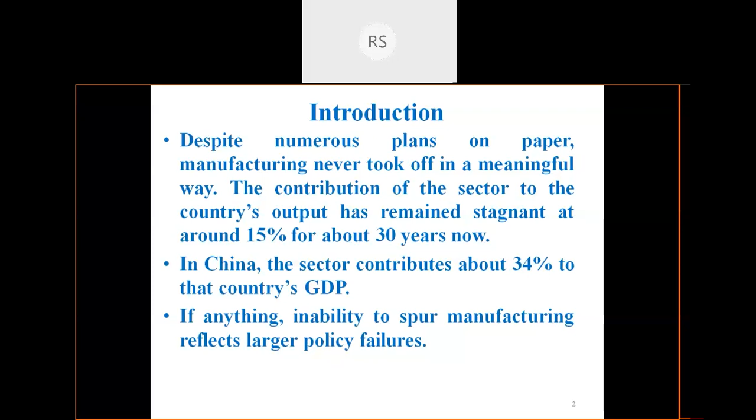This data I have taken from the Niti Aayog website, and it says this represents a policy failure at our level. The government is really serious about the development of products within the country itself.

So government wants a big increase in the contribution of the manufacturing sector. In 2004, to address this issue, the Government of India set up a National Manufacturing Competitiveness Council, headed by the Prime Minister and governed by a group of ministers. In 2006, the Prime Minister expressed concern for improving the manufacturing sector's contribution from 12-14% to 25-35% of the GDP.

If you see the Niti Aayog website, it says that by 2025 we want this contribution to be 25%, because this will add 100 million jobs for us.

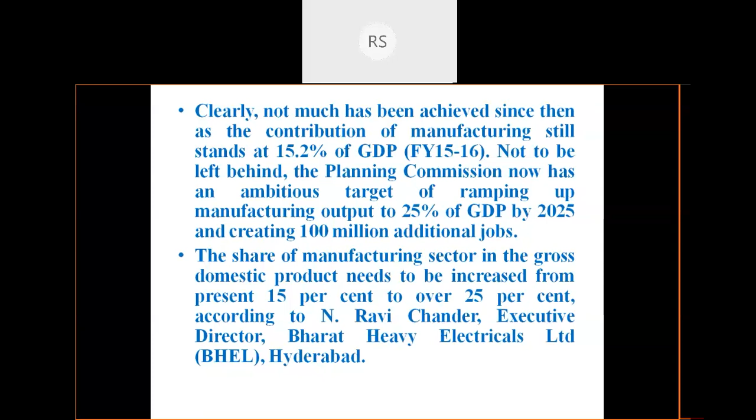This is not only the government talking about this. Even private sector and public sector people at different platforms are also giving this information, that we must increase this contribution. But there are issues like inadequate infrastructure, problems with land acquisition, and problems with labor laws.

These actually hinder the growth of the industry sector. So then what is the solution if these are the problems? In one meeting between CII and the government of Andhra, they concluded that innovation in product and process can be the key driver for growth in the manufacturing sector.

Now this is the point from where I would like to start my presentation: that innovation in product and process should be the key driver for growth in the manufacturing sector. Here manufacturing does not mean only mechanical manufacturing, but all sorts of manufacturing. So we have to innovate.

We have to come up with some product or process, and if we come up first, we become the pioneer, and then we are going to have a lion's share of the market. Let me give you one simple example.

In our country, most people go for religious tourism. Whenever they go to a religious place, they want to buy some sort of souvenir with them. Once they buy a souvenir, it is basically a token of remembrance of that particular place. From this Punjab side, a lot of people go to Nanded in Maharashtra; it's reported that around 4,000 to 5,000 people, pre-COVID, used to go to Nanded daily, and on some special days the number may be more than 10,000.

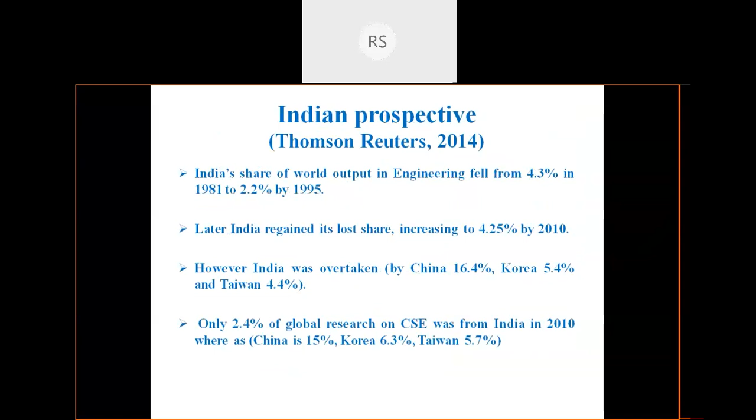We normally used to say that we are good in software, but actually, as per Thomson Reuters, it is 2.4% only. It means we need to increase the R&D capacity of our nation, right? Now to have that R&D capacity and to come up with innovative products, one of the areas is rapid prototyping or 3D printing.

That is the discussion for us, and we will specifically talk about the in-house development of 3D printing for antenna applications. Now one slide for a brief history of 3D printing. This I have taken from the Chang and Chua paper 2005, Journal of Advanced Manufacturing Technology.

What it says is that mechanization was reported around 1770, then the first computer around 1946, then the first NC numerical control system around 1952, then the first commercial laser around 1960, first commercial robot 1961, then of course CAD in 1963, and the first commercial RP system in 1988. Right now, this is 2020. So from 1988 to 2020, there have been different technologies associated with rapid prototyping, right?

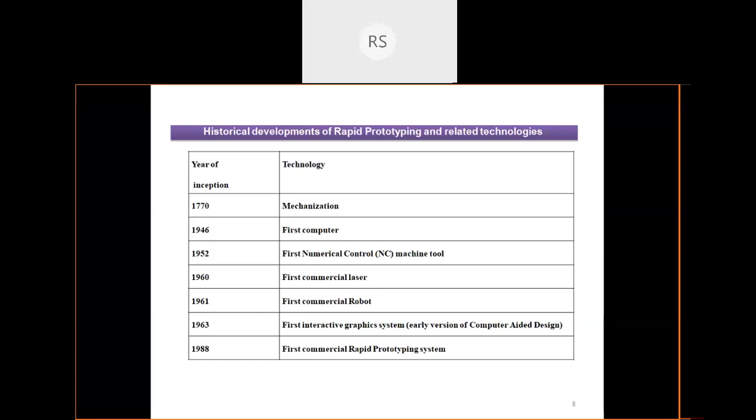Rapid prototyping can be broadly categorized into three types. One is additive in nature, second is subtractive in nature, and third is a combination of additive and subtractive. Whenever we talk about the concept of rapid prototyping, I am interested in making a prototype at a fast rate. That prototype can be a mechanical component, an electronics component, an electrical component, or a hybrid component, right?

So one simple example of subtractive manufacturing is the use of CNC machining. For the last 20 years, CNC has been doing a wonderful job in the market, and a lot of people are using standard CAD-based data, and we are just removing the material by machining most of the time. That is why it is called subtractive manufacturing.

Then in additive manufacturing, which is of course the talk of the town now, it may have technologies based upon liquids which are being added, powder based technology, or sheet based technology, right? So based upon liquid, powder, or sheet based technology, around 30 plus technologies are commercially available at very low cost, right?

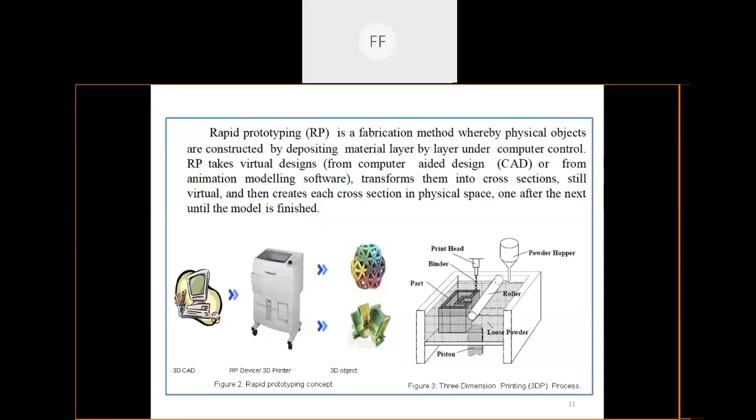Sir, you are not audible. Sir, it is not audible. Rupinder, sir? I think there is an internet issue at his end. Am I audible now? Yes, sir, now you are audible. But I think you are not able to listen to us. Sir, please check your speakers. Sir, I'm calling.

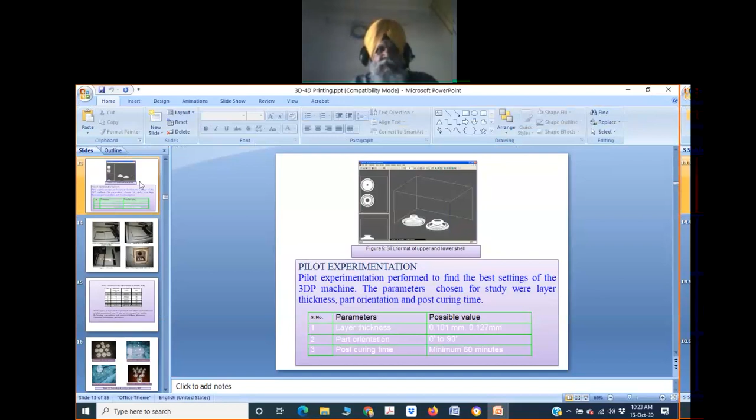Am I audible? Yes, sir, you are audible. Okay. Kindly share your screen. You have to again give me the presentation right. Can you kindly see? I don't know why this happened. There may be some internet issues. Now to share the screen. I think I have discussed this slide. Yes, sir. After this slide, we could not get.

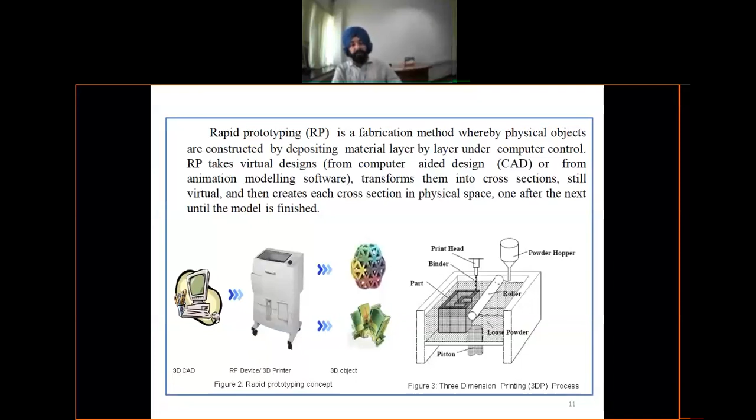Okay. So what I want to explain is, this is a basic 3D printer which was based upon powder based technology, and this was first developed at MIT around 1988, and finally it was commercialized by a company called Z Corporation. That is why this is also called the Z cast process. The basic idea is, I have two nozzles. From one nozzle some powder is sprinkled, and from the second nozzle some binder is sprinkled. So a layer of powder and a layer of binder, and what I am getting is a three-dimensional object.

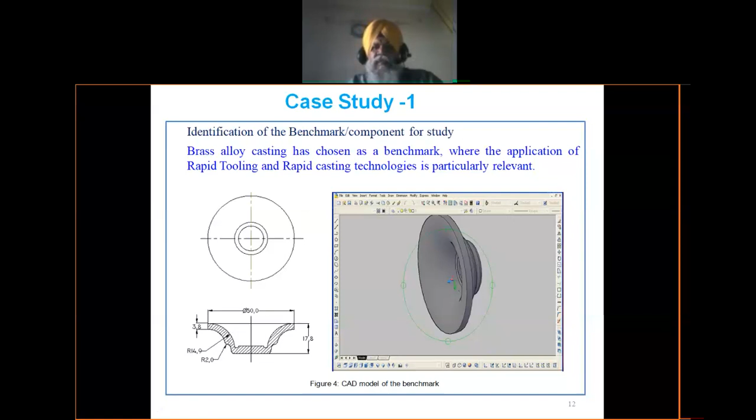Now this is one example of a typical mechanical component I am interested in making. You see, this is used in the suspension system of a truck, right? So I have a CAD file, and I can convert it using any software to the CAD model. Then we use a special file format. Now this is really important for persons who are starting their work in 3D printing.

Once we store some data and want to send it to the 3D printer, a special file format called the STL file is used by the 3D printer. STL is standard triangulation language or stereolithographic language, used internationally as a standard for giving input to the 3D printer. This is one of the slicing software used to make the different layers, which of course are virtual. Then there are some parameters I can control, like how much layer thickness there should be.

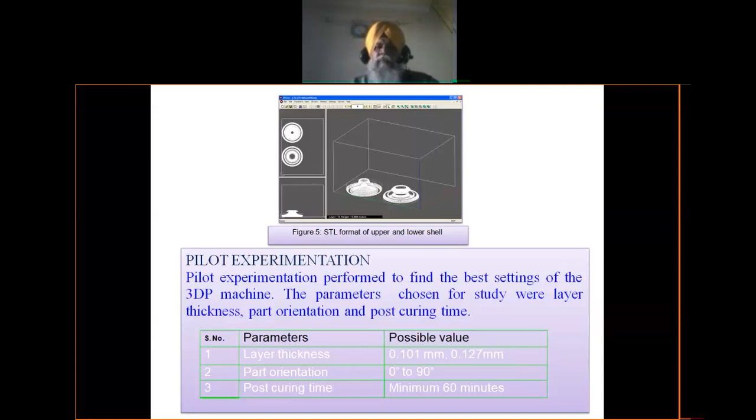Then there is the concept of part orientation. Part orientation means, suppose I am interested in making a part, I can put the orientation horizontal at angle 0 degrees with the x-axis. I can change it to a certain angle with the x-axis, let us say 45 degrees, 60 degrees, 90 degrees. Similarly, I can have an orientation with respect to the y-axis and the z-axis also. Then once I prepare a part, how much post curing time will be required?

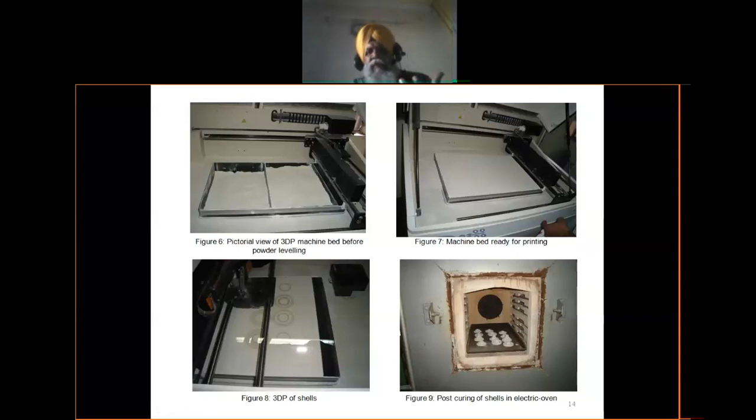Once I have a cavity like this, which is basically a 3D printed cavity, then I can pour the molten metal. So you can see the number of cavities are there. Then I am coating it with some loose sand, and finally I am getting a cup shaped component, which is actually the functional prototype that can be used for the actual 3D printing application. So this is just a simple example to understand what 3D printing is.

So by now what we understand is that 3D printing is nothing but a layer by layer deposition of the material. I can deposit the material along the x-axis, along the y-axis, along the z-axis, and similarly I can also control the layer thickness. Then once I have a particular cavity, I will pour the molten metal into it, as I have given in this particular example, and finally I will have a final component in the form of the casting available with me. So this was the basic way how 3D printing was started, right?

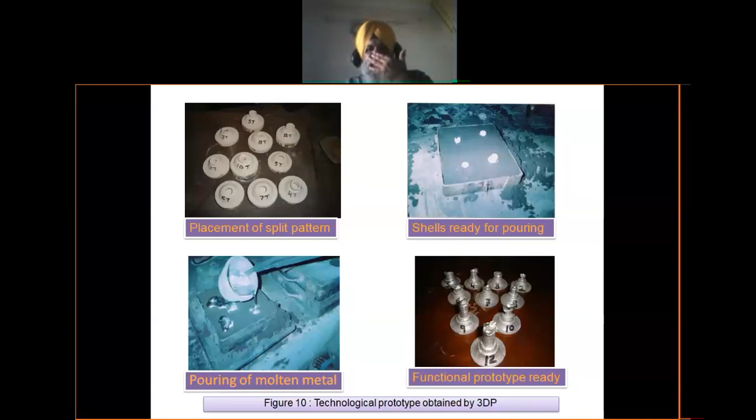Of course, this is nowadays more or less an obsolete technology. This was because of the crude way, and a lot of material wastage was there. So that is why this technology has more or less now become obsolete. Now, since we are going to talk about a technology which is more advanced and more controlled, let us have an introduction to the concept called 4D printing. So, what basically is 4D printing?

In 4D printing, the idea is that we are having a 3D printed part, but that 3D printed part is really smart, right? What this smartness means is that the part can really grow as a function of time. All of you must have come across some 2D images, like an X-ray image or a CT scan image. Then you can think of a 3D image. You are getting voluminous data, a 3D image in the form of some X, Y, and Z values, meaning some thickness is there.

Now just think of a 4D image which is changing its value as a function of time, right? Let us say you are doing some sort of scanning for a patient. One way is you get a 2D image, the second way is you get a 3D image of the problem, and the third is you see the variation in the image as a function of time for the duration you are doing that testing. So that is basically 4D imaging. Now, inspired by 4D imaging, there is 4D printing. That means the printed part that I am using has 4D capabilities.

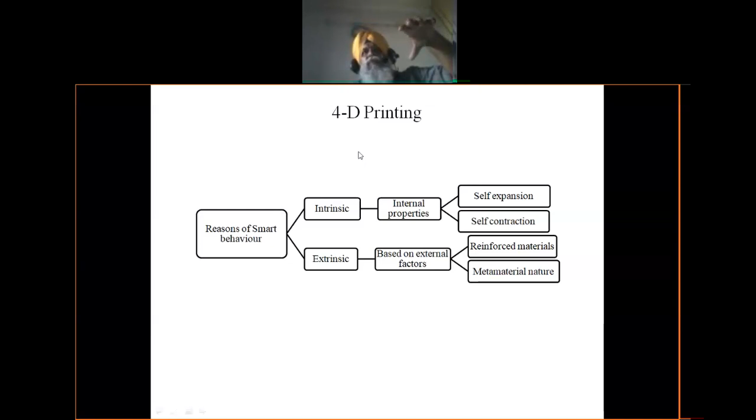We are working with some biomedical professionals who are installing ribs for a young boy who has lost his ribs because of some accident or trauma, right? Now as the boy grows, if I have replaced those ribs with a net of titanium based wires and shell, those are not going to grow. But with 4D printing, I will talk about a shell or mesh which is going to grow as the person grows.

Hello, Rupinder sir. Again, there is no voice.

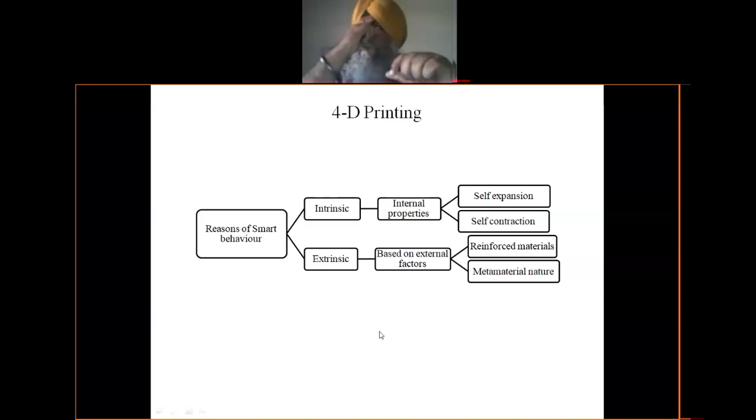And you want to know the expiry date of the product. Let us say I have a way that once my food is going to change, let's say, the color of the container, right? So that is what is 4D property. Otherwise, I need to read from the container what is the expiry date of the product.

But if it changes its color, I can directly see that this is the 4D material, and let's say the color is changed to red because of some chemical reaction. So that stimulus is going to help me in a big way.

Right now, this smart behavior can be the intrinsic property of the material, or it may be the extrinsic property of the material. Intrinsic means it has a property of self expansion or self contraction, like take the example of a piezoelectric crystal.

If I have a piezoelectric crystal, I apply a load over it, then it is going to change its dimension. So if I release the load, it is again coming back to the original position. So this increase in dimension or decrease in dimension with the application of a load is going to be a really useful application in 4D printing.

So there can be a property like self expansion or self contraction. Sometimes these properties are added externally into the material, right? Then we call it as a...

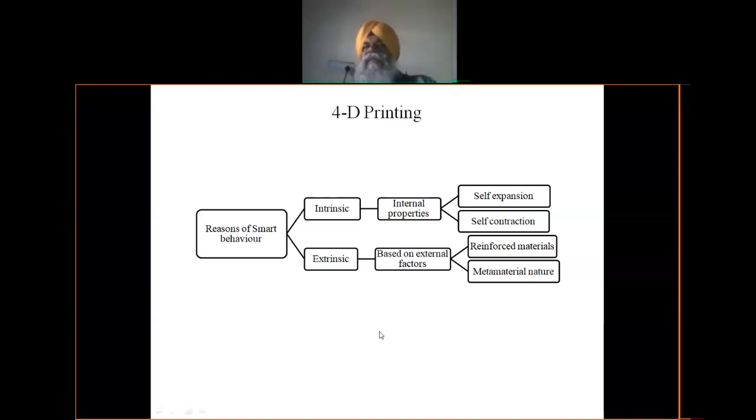...type of material. For example, I'm interested in developing some biosensor or antenna which is going to give me an emitter and a transmitter. Then I am going to add some property into the material. For example, how I can add that property into the material.

For example, I am interested in increasing the electrical conductivity or the magnetic property of the material. So I am adding some graphene as a reinforcement into my thermoplastic. So this is one example of a reinforcement type of material.

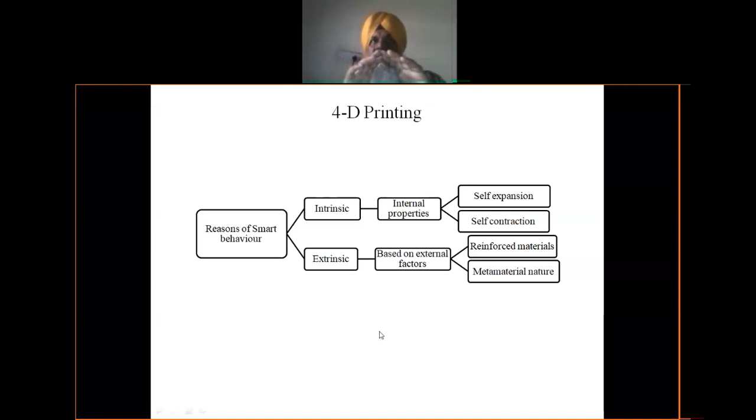Then we have another category that is called the metamaterial. So what is actually a metamaterial is - all of you must have seen a railway bridge, right? If you see that railway bridge, it is not a straight section. Rather, we have some complex sections which are aligned at a particular angle and a particular length.

So metamaterial is a typical example of the rearrangement of links and the angles at which those particular links are aligned to give some defined property to that material. So that is actually going to improve some of the mechanical properties of the material, right?

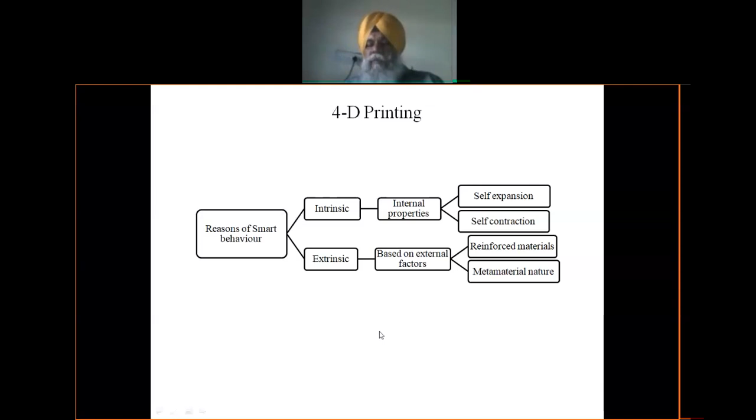Like I have already explained to you, the 4D printing materials can be categorized as shape memory polymer, there can be shape changing polymers, and there can be the materials. So there are many good papers for all these types of materials.

There can be one-way programming, there can be two-way programming, right? Like, what is the one-way programming, two-way programming? For example, your material is in state A. Now you give some stimulus, which may be, let's say, the temperature, and it is going to convert into...

...shape B. One simple example is, let's say I have water, I extract heat from it, right? So I reduce the temperature, so it is going to become ice, right? So this has changed its state. So what is the stimulus? Stimulus is the temperature. Now again you give the temperature, it will again come to the liquid state, right? So this is one way of programming.

Let us say I have a matter in state A, and I want to convert it into state B using a stimulus like an electric field. Once I switch on the electric field, it behaves in a particular way. Once I switch off the electric field, it comes back to the original position, right?

There can be multiple stages, like from A to A1 using some stimulus, then from A1 to A2 using another stimulus, then from A2 back to A using another stimulus. I will show you with a case study how this stimulus controls some typical dimensions in my antenna design, and how we go for characterization from a material processing viewpoint.

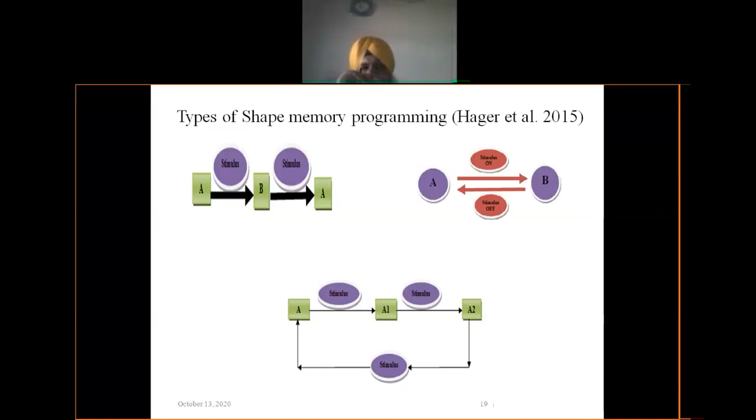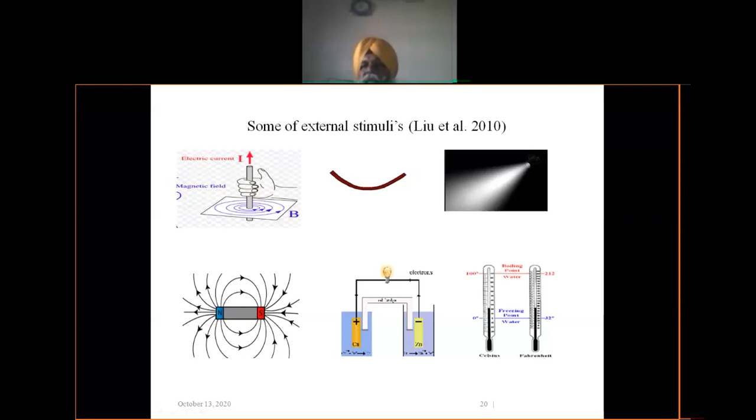There can be different stimulus types, like in this screen you can see I can have a stimulus in the form of electric or magnetic field. I can have a stimulus in the form of mechanical load, light, temperature, or some chemical energy. These different stimuli help me give a particular property to the material.

To understand it better and to go for characterization along with development of some antenna for the flexible antenna, let us understand some of the basic things required for making it more flexible.

For example, I am interested in making some 3D printed flexible strip for making an antenna. So what I found through the literature is people are talking about using ABS material along with NinjaFlex material, which gives some sort of flexibility. But once I see this problem from the material processing engineering viewpoint, I have to basically understand how this material is going to flow.

For example, if I take 10 liters of water in a container and drop it over a table, it will flow and cover some distance. Now I take the same volume of honey and drop it over a table, definitely it is going to cover less distance. The simple answer is there is a difference in the viscosity and density of the material.

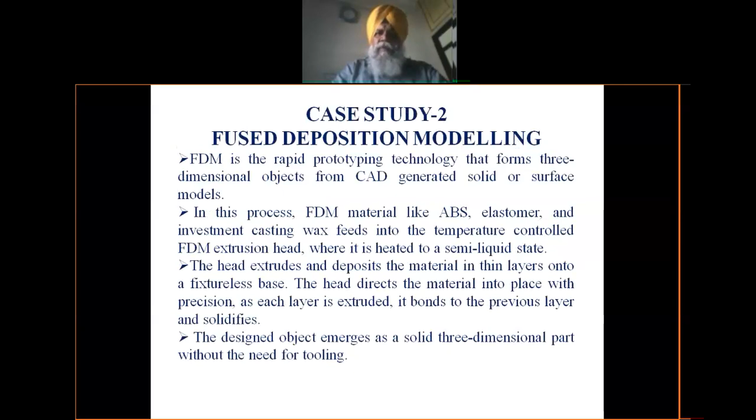So to make a wire-based 3D printing, I need to have control over the flow property of the material, right? The particular technology I am talking about is fused deposition modelling. This will be more clear from this presentation slide.

We prepare a feedstock filament in the form of a spool, and this spool is fed into a zone I am calling the liquefier. First stage is to prepare the rheological analysis of the material, which tells me how much flow of the material will take place. Based upon that flow which I have already controlled, I put the material into the extruder, which helps me prepare the wire.

Now this wire is in the form of a spool, fed into this chamber which I call the liquefier. What is there in the liquefier? I have a set of mechanisms, sort of a gear mechanism, forcing this wire type material to enter into it. Then there is a liquefier chamber.

Normally for commercial printers, the inlet diameter of the wire varies from 0.5 to 4 mm, and the output diameter is normally around 0.8 mm. Once this material is fed into the liquefier, there is deposition of material layer by layer, and the platform lowers down as material is being deposited. Is it clear now?

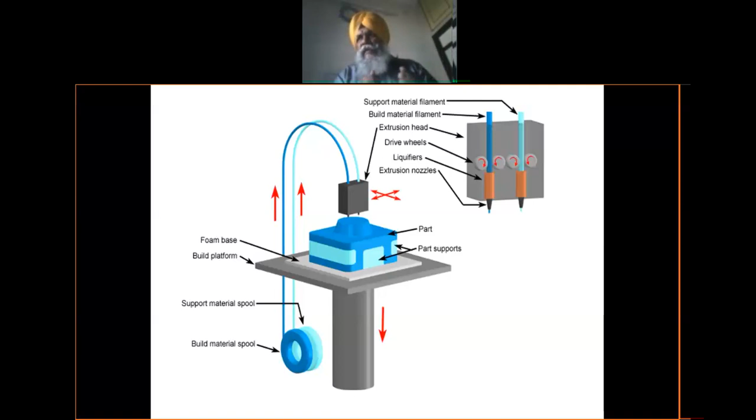Now just imagine for making an antenna, what I need is a conductor and an insulator type combination, right? And my interest is to have a flexible sort of patch antenna or something like that. So I will control the rheology of the material, and based on the rheology, I can control the thinnest section possible, right? How thin a section can be there?

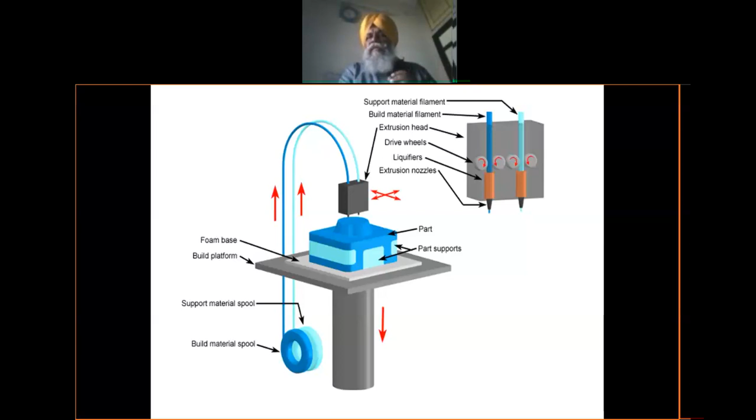Once I am using multi-material printing, more than one material printing, then I have to really control the rheology of the material. Now I will try to explain what is the typical application of the 4D material, like in this particular example, and this I am going to explain for the antenna application also, but specifically in a typical structural engineering application.

Actually, this was an international project awarded to us in collaboration with one of our collaborators in Italy. The project was about developing cabins for offices and homes where the inside temperature has to be maintained because of the extremely cold environment outside, with outside temperatures of minus 30, minus 20.

What we want for such a situation is an insulator, and the best is wood. We basically want to control the temperature in that cabin. Now, with pollution norms as well as controlling agency norms, we cannot go for excessive cutting of trees. So we want something as a replacement of timber.

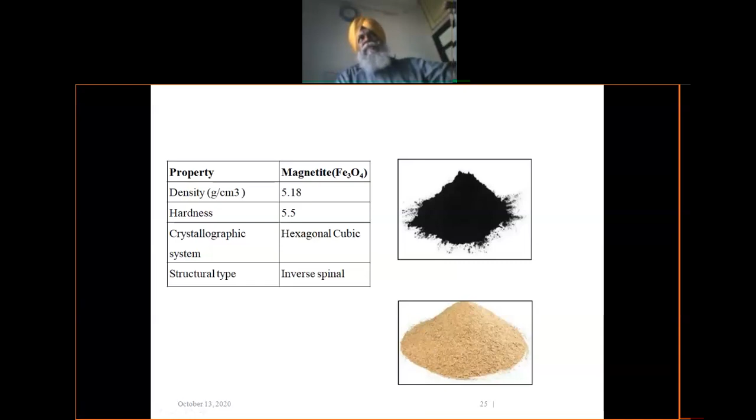So what we did is we selected wood dust. Then, in most of our office cabins we use PVC paneling, and once the color or luster of the PVC paneling is over, we used to throw it away, adding to plastic solid waste. So we wanted to recycle that PVC material.

Then the PLA we selected is basically a biocompatible polymer, and its fumes are not that harmful to humans. Finally, this magnetite powder was added to give me the 4D properties, which I can check, and this is also really important in the antenna fabrication.

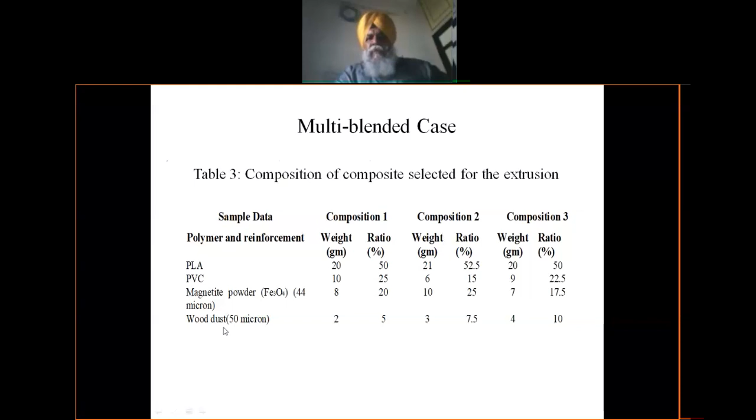How do you see this? Initially, for different compositions of PLA, PVC, magnetite, and wood dust, different blends were prepared. Based on these different blends, we used some design of experiment technique, and based on that, we prepared different sample wires with different proportions of PLA, PVC, wood dust, and Fe3O4, which is basically a magnetite powder.

Now I'm interested in a typical self-assembly application. So how is the self-assembly going to help me? Imagine I'm interested in making some tiles. The side of the tile facing the human will be having maximum PLA.

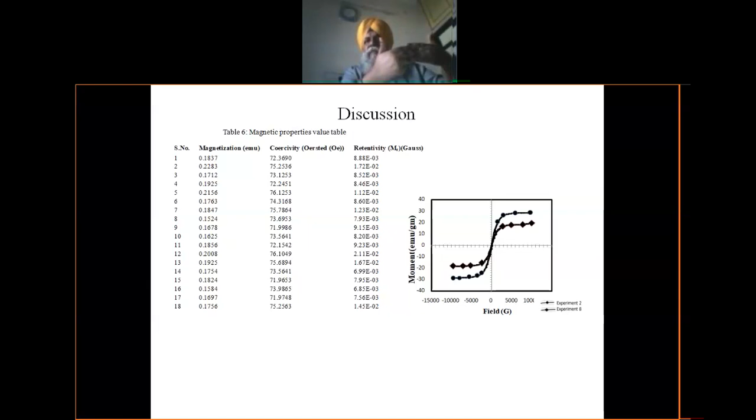The next layer will be having PLA and PVC. The next layer will be having PLA plus wood dust, and the last layer, going towards the wall side, will be having Fe3O4 powder. Why have we selected Fe3O4? Because it has a magnetic property.

Imagine I have a metal frame in the form of some wire strip. Once I give a magnetic field, I give a current, so this Fe3O4, because of its magnetic nature, is going to assemble over that frame. Once it is assembled, I will simply screw it, and then I will have a permanent assembly. Once I want to change the material, I can just switch off the current, so the magnetic field will be stopped, and that particular force of attraction will be over, and I can disassemble it.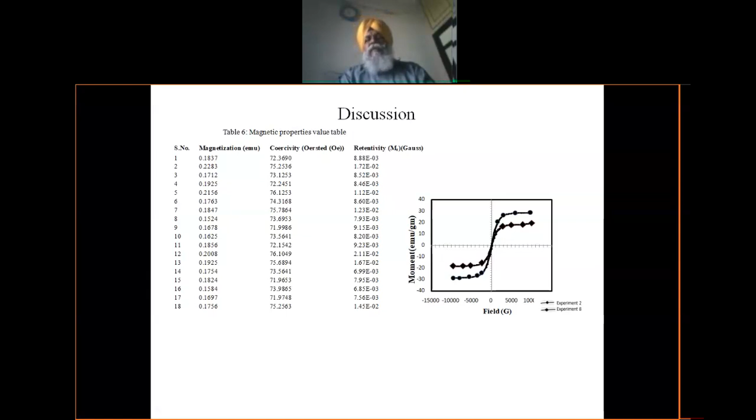This is really going to help me in the erection of towers with different requirements of properties. So here we have developed the BH curves, and we observed how much is the magnetization, how much is the coercivity, and how much is the retentivity with different compositions of PLA, PVC, wood dust, and Fe3O4. We were able to develop a tile, then performed mechanical analysis and morphological analysis based on scanning electron microscopy and EDS analysis for the elemental composition. Based on this, we came to know which particular proportion is better and why.

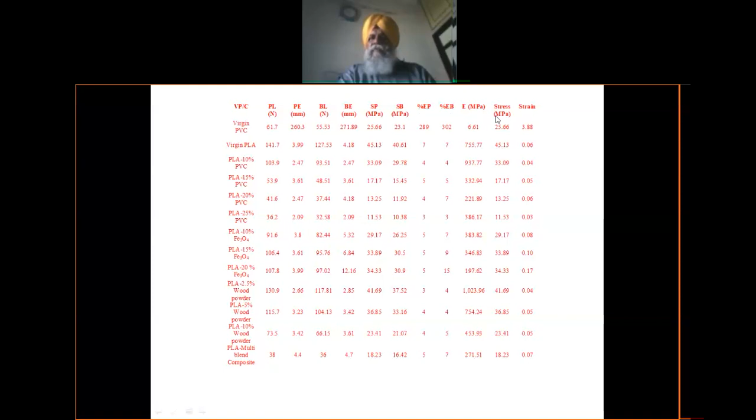And then finally we try to have properties like maximum peak load, peak elongation, break load, break elongation, then strength at peak, strength at break, percentage elongation, Young's modulus, then stress strain. These values we can all calculate for this particular establishment, right?

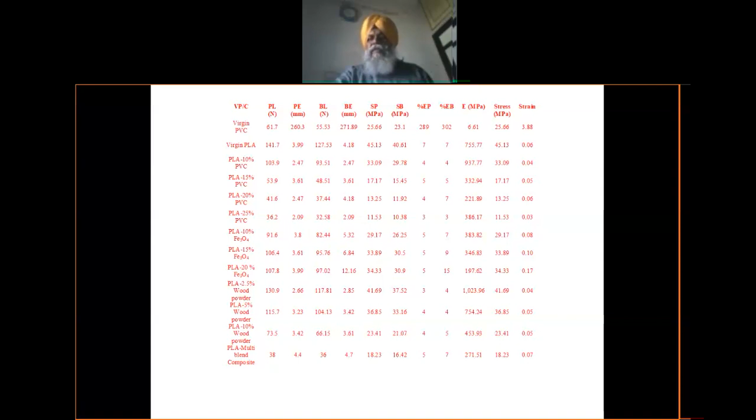You just want to locate your antennas at some remote location, how much the environmental conditions will be there. Let's say there are adverse environmental conditions, so what will be the impact on the mechanical properties? Actually we can see with this hybrid material, we are able to develop a stress strain curve which is something like this, and the area under the curve is basically giving me the modulus of toughness. So this is going to give me very good information that once my material is under impact load, how this antenna is going to behave, how this material is going to behave. So this is really important for the different composition of the material.

Now this is another test which I suppose as electronics people you may be interested in. This is basically called the thermal analysis of my material. I am also calling it a thermogram. Actually, what my interest is, is to understand in a better way.

Let's take one simple example. Suppose I have a bucket in my bathroom and I may use it for a couple of years, and there is no crack in that polymer bucket. Now I take a similar quality bucket and put it on the rooftop. You will see after a few days there are cracks. Basically why? Because of the excessive change in the temperature condition, like in the morning there may be, or during the daytime there will be excessive heat, and then during the cold night time there is an excessive dip in the temperature. Now, the energy absorbed during the heating and energy absorbed during the cooling cycle may not match with the capacity of that material, and that material is going to crack.

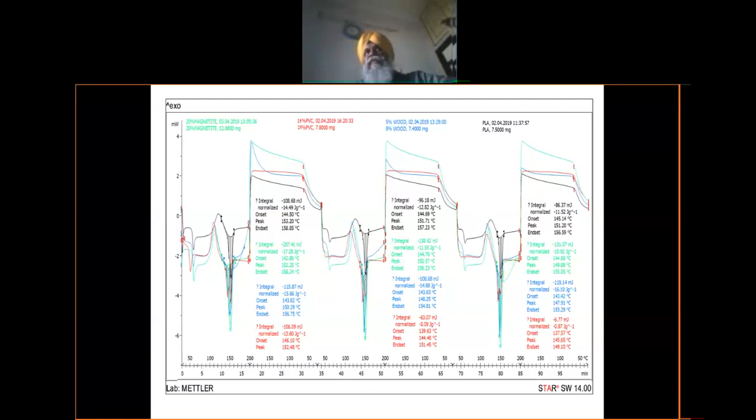So similarly, when I'm going to develop some antenna material for external applications where there is an excessive change in the temperature condition, I have to be very particular about how this material is going to behave under the repetitive heating cooling cycle. Now what we do is, along the x-axis, I have material temperature from room temperature to 150 degrees to 200 degrees. Like you can see over here, from room temperature I am moving to 200, then from 200 to room temperature, then from room temperature to 200, again from 200 to room temperature, and so on. So I can have a repetitive heating cooling cycle, and along the x-axis you can also see there is a change in time also, so I am also increasing the time.

Whereas along the y-axis, what I am getting is basically the energy absorbed. So basically what we want to say is, in the different heating cooling cycles, what is the amount of energy absorbed with the different type of material. If you see most of the papers on antenna design, they have never talked about the thermal stability of the material, and this is something going to be installed in the outer environment where there will be excessive change in temperature conditions.

Sometimes there may be a rainy season, sometimes there can be extreme cold, like specifically in the northern part of the country we may sometimes have temperature below zero, and sometimes the temperature goes to around 50, 55. So my antenna material must be a stable one within that range of temperature, otherwise its properties are going to be different. So what we observe in different heating cooling cycles is how my material is varying, and I can basically select that proportion in a way that my material should be thermally stable. So this is one form of thermal characterization which is a must specifically for external installation of our material.

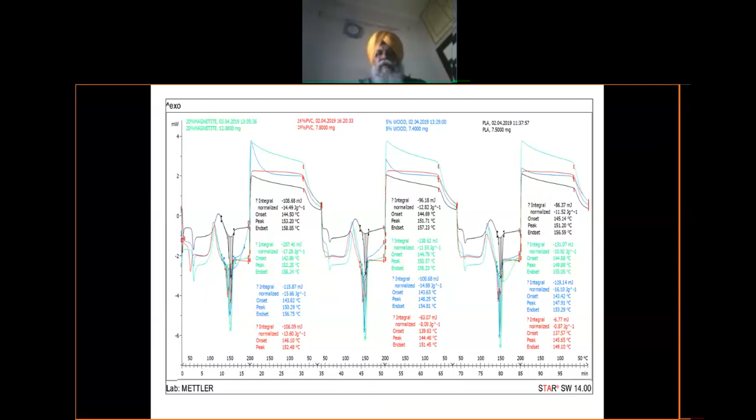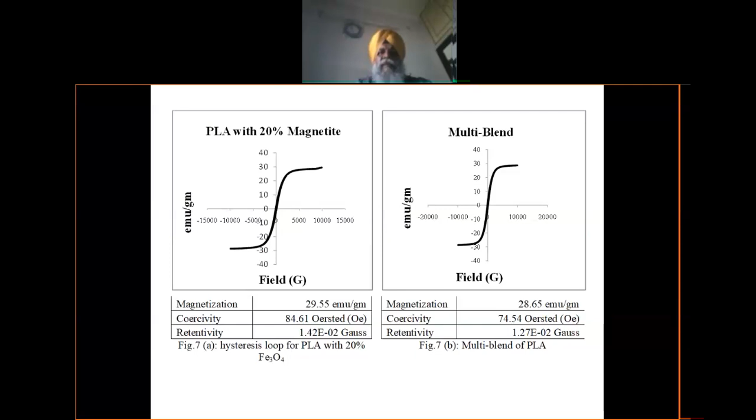Then you can see I have a BH curve, and we want to see what is going to be there under different environmental conditions. So this is another case study that I want to discuss with you, the use of ABS material for 3D printing and 4D printing applications.

So in this ABS, what we have done is we have reinforced the graphene. I think this is more close to the heart of the electronics people, because graphene is known to be the best material for increasing the thermal conductivity, electrical conductivity, and the magnetic properties of the material for typical 3D and 4D applications. And we are calling it a secondary recycled ABS.

Now to add some property, normally we add some sort of reinforcement. For example, I add some graphene into it to enhance some property, maybe thermal conductivity, maybe electrical conductivity. Then it is called the secondary way of recycling. But secondary and primary both are using a mechanical means for mixing, right?

Then in a tertiary way of recycling, what we are doing is we are using some chemical way of recycling. For example, in mechanical recycling, the dispersion of the reinforcement may not be uniform. To make the dispersion up to the nano level, we basically blend the component by the chemical mixing way. For example, acetone is one of the chemicals that can be used to dissolve the ABS material.

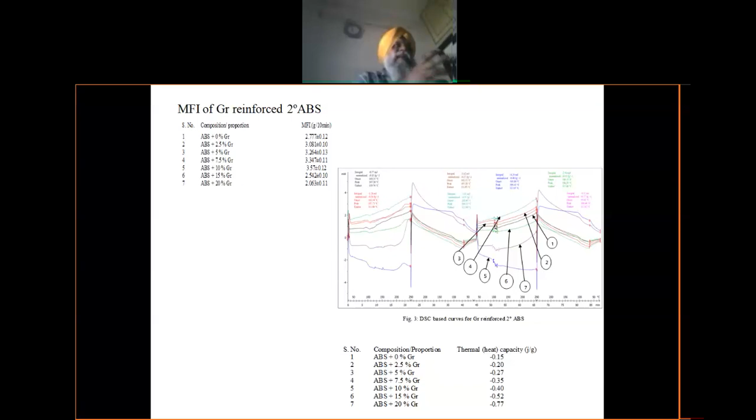So I can have a particular quantity of graphene in my ABS, right, based upon my requirement in the thermal analysis. I can control basically how my material is going to perform in what type of environment for making that sort of antenna, right? Then similar to the previous case, I can go for the magnetic properties.

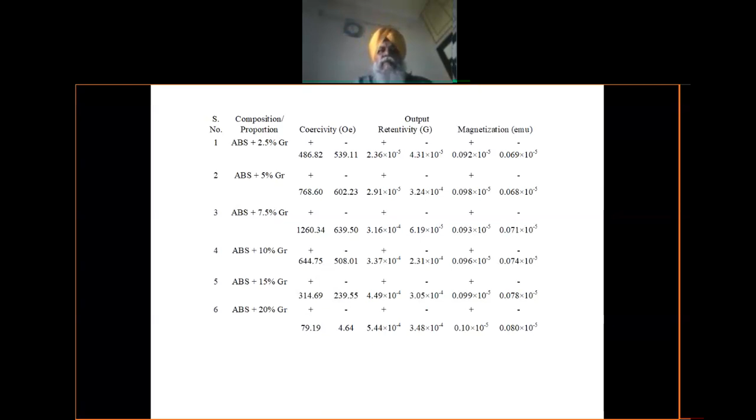But sometimes I have to trade off the required magnetic property in my material, because I need to generate some electromagnetic waves, but I also need to see what sort of thermal stability my material requires. So I can do this type of balance as a material processing engineer for the development of my own material, right? So this is one observation.

Now this is another case study that I want to share with you. PVDF is one of the established thermoplastic materials with a piezoelectric property. Basically, polyvinylidene difluoride. It has hydrogen and fluorine in the alpha phase. So when it changes into the beta phase, what happens? All the fluorine goes to one side of the chain and hydrogen to the other side of the chain. So we get a charged cell, right? So basically the beta phase is responsible for the piezo type property in that material.

And to increase the piezoelectric property of PVDF material, people have used the reinforcement of BaTiO3, that is basically barium titanate. And to increase the electrical property or the thermal property or the magnetic property, people have reinforced the graphene. So in this particular example, for development of the antenna type of material as a material processing engineer, PVDF with the reinforcement of graphene and barium titanate, I am going to show you, right?

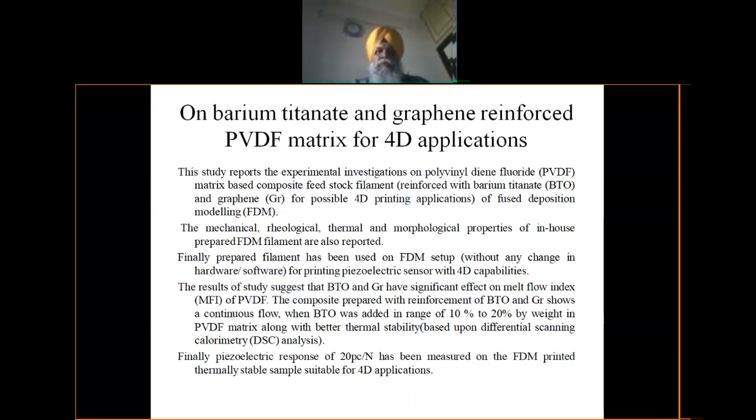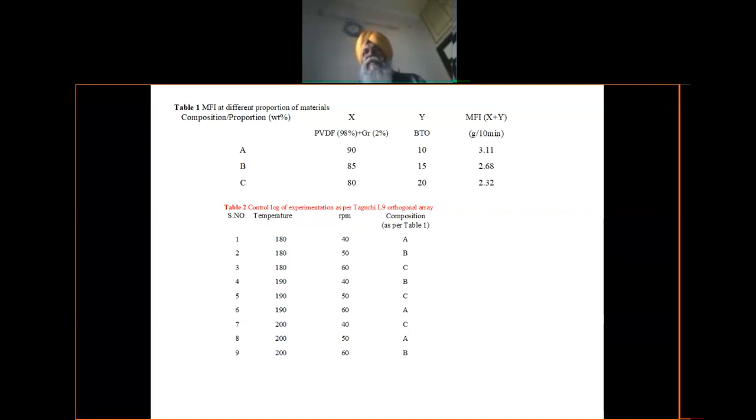So PVDF with graphene, as per the literature, more than 2% graphene reinforcement was not recommended. So the different proportion of PVDF and barium titanate was selected. Their MFI was calculated. Now, one of the questions you may have, why am I interested in this MFI? You see, the commercial open source printers run with an MFI of around 2.5 grams per 10 minutes, right? If you select the proportion of the material in such a way that your MFI remains in that range, then you can print any material without any change in hardware or the software of the system, right?

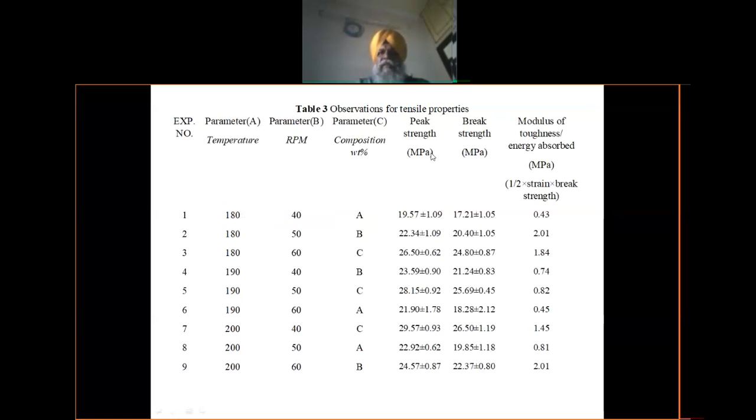Then we prepared in a similar way the feedstock filament by changing the temperature, by changing the RPM, and by changing the proportion of the material. And similarly, the properties, like you see, the break strength, the peak strength, the modulus of toughness, these types of things were calculated. Right? How will we calculate? We will simply calculate the area under the curve.

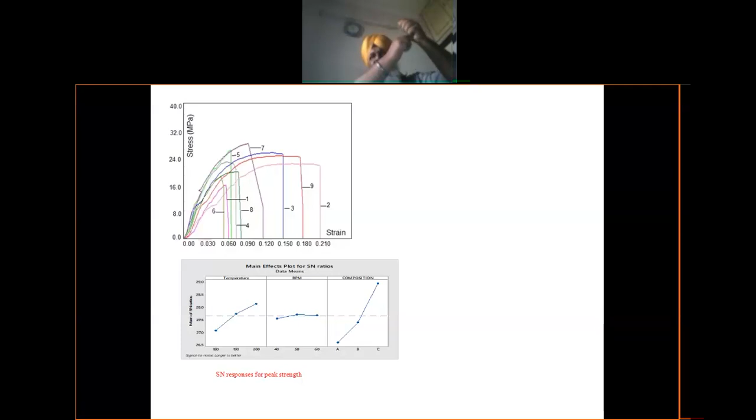This is basically a test done as per ASTM D638 standard. What this test says is I prepare a dog bone shape component, I hold it in the UTM, and then I apply a tensile load, and these types of stress-strain curves are developed, and we try to see what is the area under the curve. And we can see some of the optimization parameters.

Then I'm going to understand what is the melting temperature of my material, right? And I'm going to know, if I am heating above the melting point, what will be the crystallinity in that material, right? Most thermoplastics are not crystalline in nature. They are all amorphous. So their flow behavior I need to control based upon the rheological and the thermal property, right? That is why this thermal analysis is really important for development of the material for any thermoplastic-based 3D printing for any particular application.

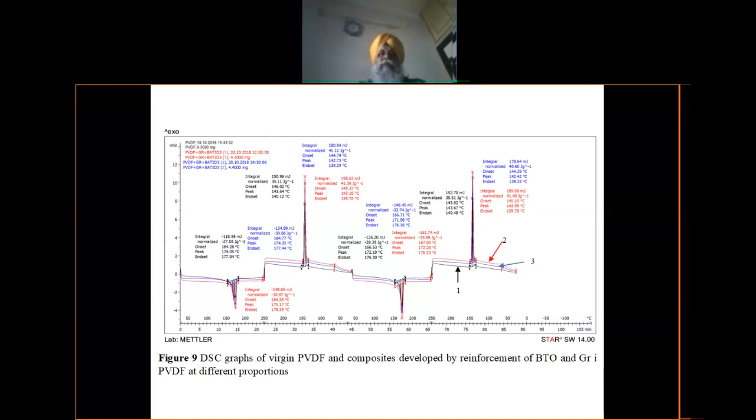Then that material was basically fed into the 3D printer. So I print the different sizes of the specimens. Then we measure the D33 effect to understand what is the piezoelectric constant. So what we observed for this case, this was 20 picocoulomb per Newton. That was sufficient for giving me some sort of electrical signal to get it converted into some useful information, right? So this is 20 picocoulomb per Newton. That was really appreciable for us for developing some sensor with the 4D capability.

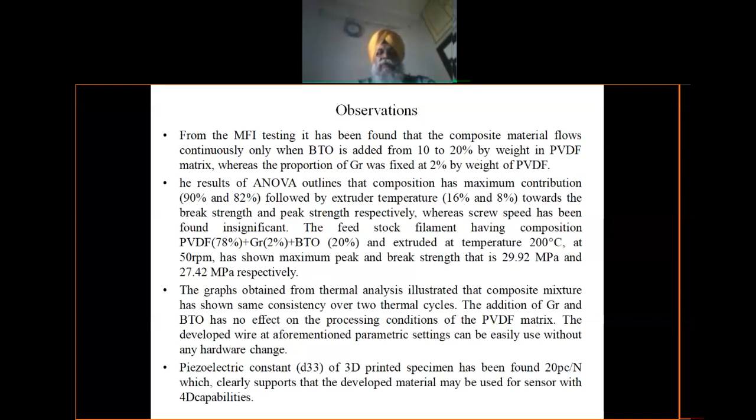Now just imagine I am interested in developing some material for my antenna or some 3D part which can have change in the dimensional features. Now in this particular example, I'm going to explain to you the use of ZnO nanoparticles which have been put into polylactic acid, which is another polymer, and I am interested in controlling their thermal, mechanical, morphological, and shape memory properties. For example, I am interested in developing some wristwatch, and that wristwatch is going to have some sort of antenna application inside.

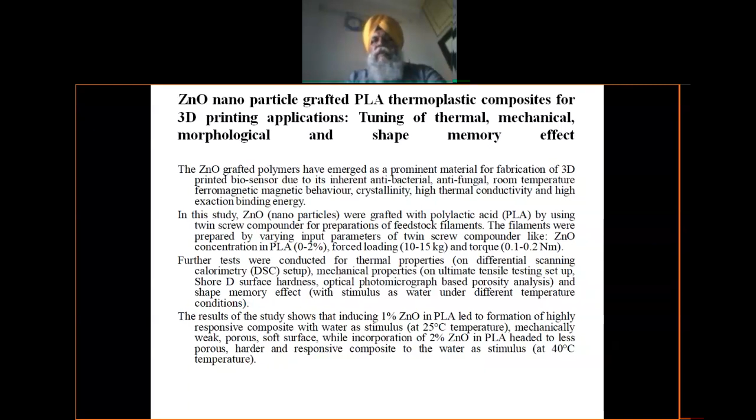But I want it to be biocompatible, number one. Then I want it to be a good signal emitter and transmitter, and I want it to be more thermally stable. I want it to be more mechanically stable, and I want that once it is added to my body, it has a shape memory effect, and it is only activated or actuated once it is installed in my body, right? So for that purpose, I'm interested in developing some smart materials.

So how we actually move is, let us say I have mechanically blended ZnO particles. So ZnO, I can get nano size from the market also, or I can synthesize ZnO through a sol-gel method, right?

So in this particular example, these ZnO nanoparticles were blended with PLA. So this is a twin screw extruder that I am showing to you. Here you can see the feedstock filament is coming. So twin screw compounding for PLA and ZnO particles. Now I have a sort of feedstock filament available with me.

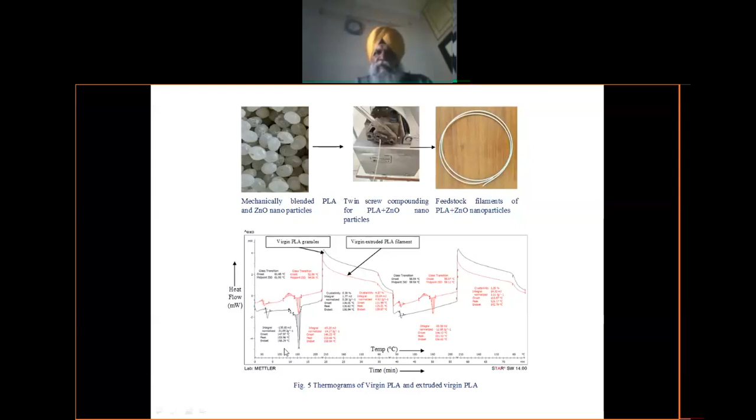Now you see in this particular thermogram, I am using a different proportion of ZnO and PLA to understand what is the effect on the glass transition temperature, what is the effect on the melting, what is the effect on the crystallinity, these types of things, right? From room temperature to, let us say, 150 or 200, and then I will go for the different heating cooling cycles. So this will be more clear from here.

But we want to see whether with this reinforcement, the energy absorbed in each heating and cooling cycle remains the same, or it is going to vary in the successive cycles. What we observed is for these types of polymers, these types of smart materials, for 3 to 4 cycles the material is stable, but after four cycles the material is going to behave in a different way. So we have to think which particular composition is going to give me this type of material in a more stable manner in the heating and cooling cycle.

Because once you install this material outside as an antenna material in some outside environment, then you want it to be there for, let us say, 1 year, 2 years, or 5 years, right? It is not that you are going to change it in one day or 1 month. So repetitive heating and cooling is going to be there, right? So what we did is we selected one dimension, which is in the U-shaped component, and this was 3D printed with different proportions of PLA and ZnO.

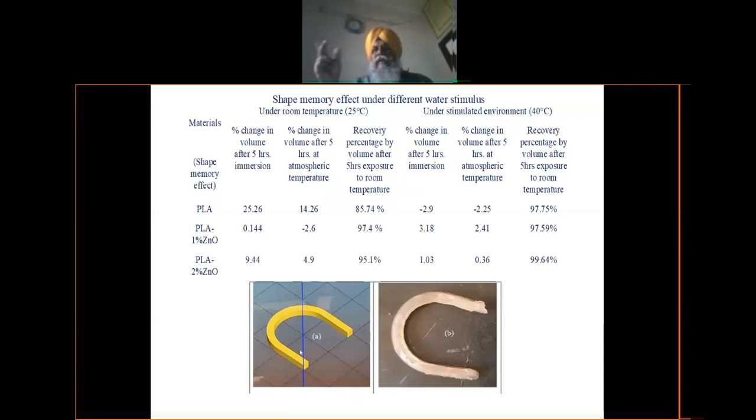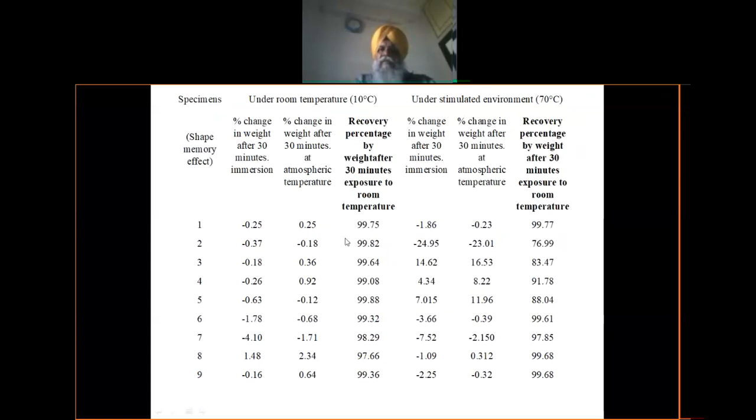These two values came from those DSC thermograms, from where I came to know that this material is going to have this much Tg, glass transition temperature, and I must observe the property within these materials, right? So this is another typical 4D application.

That means if I select a particular material specifically for the outside antenna application and it is more thermally stable, then of course the outer environment may have rain, or a change in temperature. So this hydrothermal stimulus is going to affect my material, whether it is contracting or expanding, how it behaves. For example, in extremely cold temperature, similarly extremely hot temperature, how this is going to behave.

Now let me give you one more example for this type of material in a quick way.

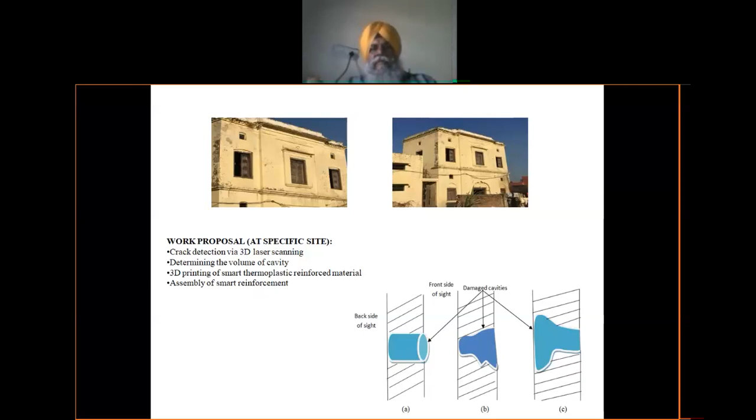This is a heritage structure, and I am interested in the maintenance of this structure. I also want that if some antisocial element tries to damage my heritage structure, then I get some signal. So that signal, either emitted or received through some way, helps in the better surveillance of these heritage structures. There are different structures where I can use this, and these type of smart sensors as surveillance. We are working on some bridges and old buildings which are under the state tourism department or under central government establishments as heritage structures.

This is a project under the Department of Science and Technology for the betterment of these heritage structures. Now let me come to the technical part, since I have limited time available.

So what we actually did is we selected three different types of polymers: one is HIPS, another was ABS, and another was PLA. The HIPS had an MFI in the range of 7.5, ABS had an MFI of 8.7, and PLA had an MFI of 13.52.

That means if I apply the same load under the same temperature condition, PLA can produce a very thin section, whereas for HIPS, I need to produce only a thick section.

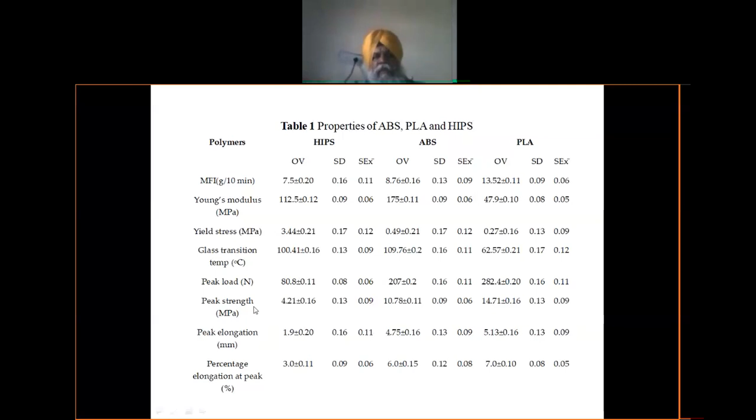Then there is a change in the Young's modulus of the material. PLA had a minimum Young's modulus. Similarly, there is a change in yield stress and a change in glass transition. For HIPS, the glass transition was 100; for ABS, it was 109; and for PLA, it was 62. Properties like peak load, peak strength, peak elongation, and percentage elongation were also observed.

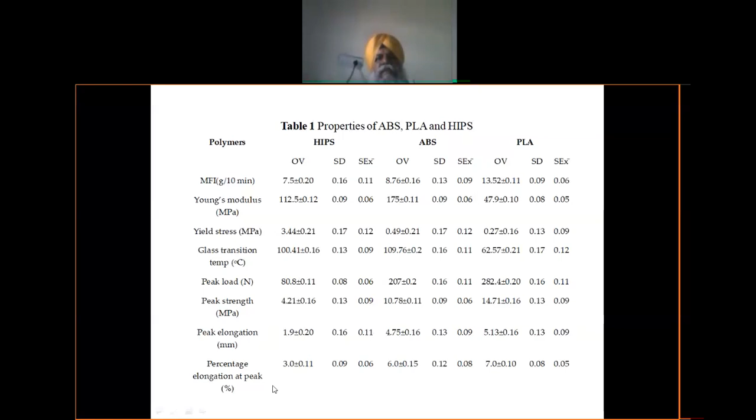Then we tried to see multi-material printing at some fixed parameters. We used an open source, locally made 3D printer under static conditions: filament diameter was fixed, layer thickness was fixed, and filling pattern, filling speed, and travel speed were fixed. What we varied is that sometimes we prepared the lower layer of ABS, intermediate layer of PLA, and top layer of HIPS. In another experiment, we prepared the lower layer of PLA followed by HIPS and then ABS.

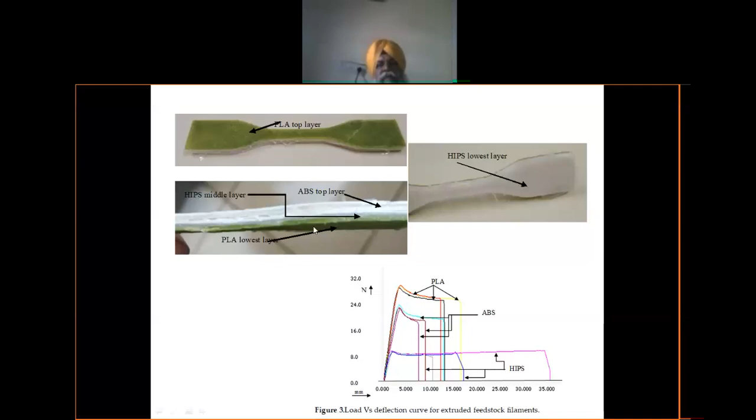This will be clearer from this picture. I'm interested in making this dog bone shaped component with a top layer of one material, intermediate layer of another material, and lower layer of some other material, and then we try to see the effect on mechanical and thermal properties. Looking at the stress-strain curve for different compositions, I came to know which particular layer combination—lower, middle, and top of different materials—gives the best mechanical property.

Then, according to that, once I am using a different substrate material along with a conducting and non-conducting material and applying a potential difference in a typical antenna application, I can basically use it as a good antenna material with a typical curvature, especially for the restoration of these commercial buildings.

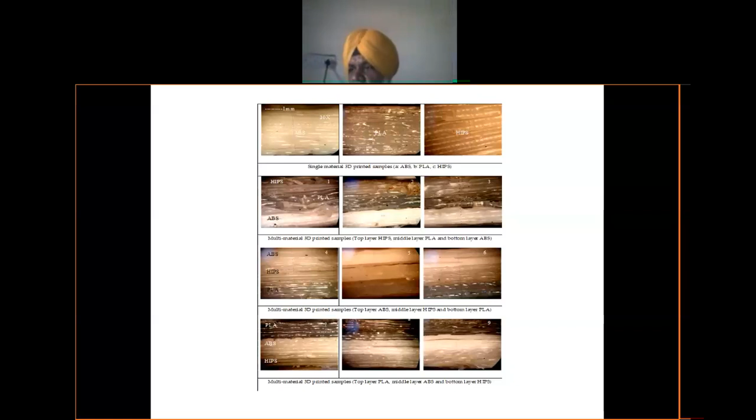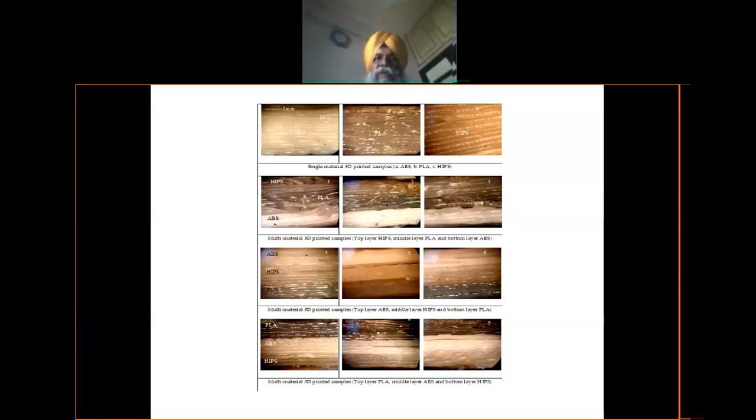In a base paper, people talked about flexible antennas using ABS with NinjaFlex or other commercial thermoplastic materials. We can do a similar exercise with open source materials available at low cost. But we need to know its rheology, thermal stability, and mechanical properties. I can control the dimensional features, emissivity features, thermal stability, morphology, and modulus of toughness, so that this material behaves better for high temperature or external environmental applications.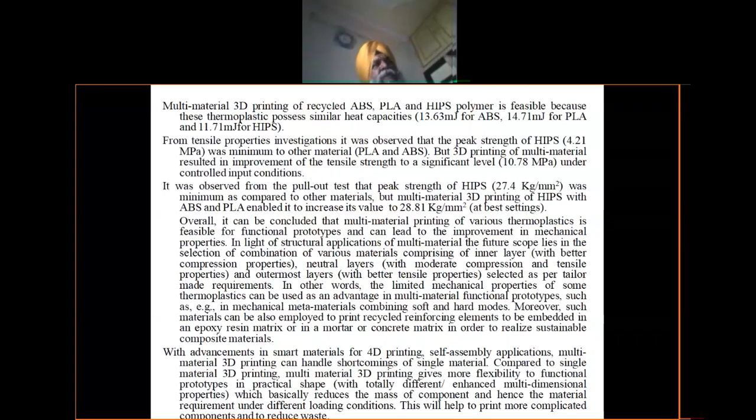There is another application for this. For example, my heritage structure has a convex shape. The inner layer here is under compressive load and the outer layer is under tensile load.

Now, if we use a single material for the whole structure, we're making a compromise, whereas the inner layer needs better compressive property and the outer layer needs better tensile property. With multi-material printing, I can combine materials with better compressive property on the inner side and better tensile property on the outer side. And then I can also think of providing some charge for the fabrication of an antenna.

I can control and use that signal for judging if somebody has attacked, or if some antisocial element is trying to damage the heritage site. So these are some of the observations in this area.

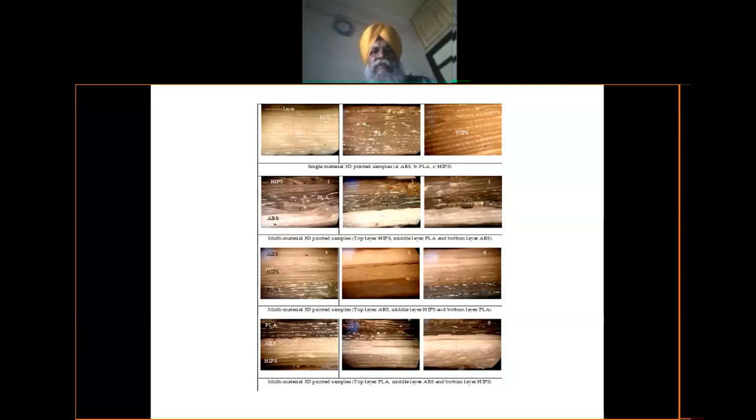Now, the last discussion before I conclude my talk is how to decide which dual material to print in different layer combinations. This application relates to a particular case study, for which we selected two different materials: one was ABS and the other was PLA, both 3D printed.

This is a standard specimen as per ASTM D795 for flexural testing, and similarly ASTM D638 for tensile testing. You can see some printing going on here.

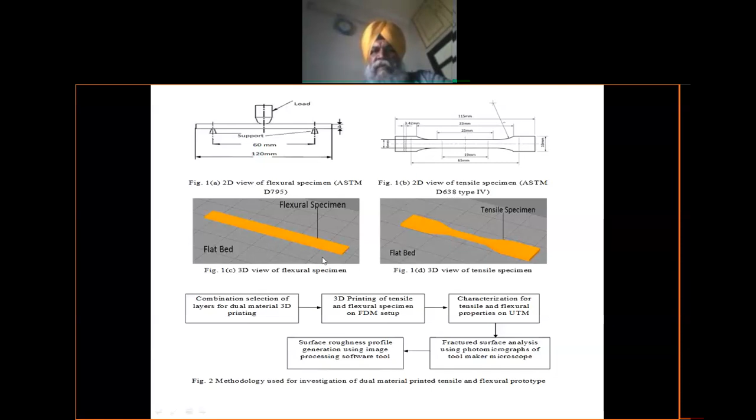We performed random experiments in which all the materials were printed in different layers, with bed temperature at 75 degrees, nozzle temperature at 200, while infill percentage, infill speed, number of perimeters, raster angle, width, layer height, and number of layers were all kept fixed.

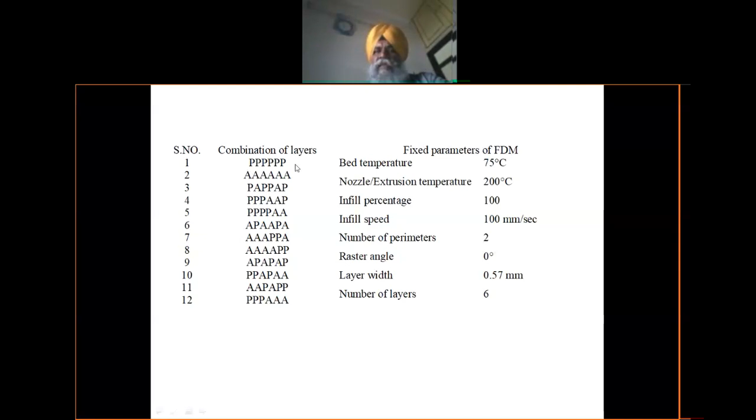So once we had all layers of a single material, let's say all 6 layers of PLA or all 6 layers of ABS, we then randomly selected combinations like PLA on ABS, ABS on PLA, and tried different combinations to see the effect on mechanical properties when doing multi-material printing for this type of substrate material.

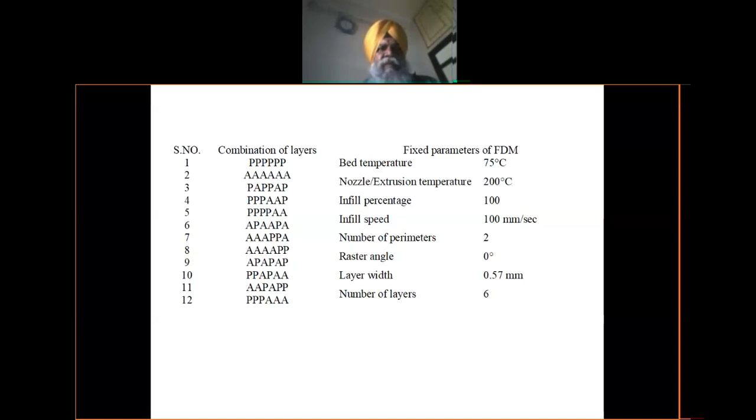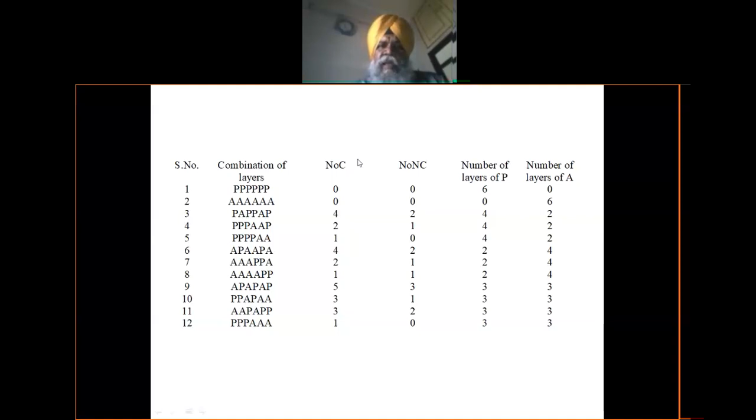We came up with a new concept called number of conversions, NOC, and number of negative conversions. What this actually means is, if I am changing the layer from one material to another, that is called a conversion. And what is a negative conversion?

If the PLA is deposited over the ABS, what happens? The PLA comes out in globule form, as I have shown you in one of the examples. That is called the negative conversion. But if ABS is put over the PLA, that is not a negative conversion.

It will be more clear from this example. Here I have deposited 6 layers of PLA. So the number of conversions is 0, and the number of negative conversions is also 0. But the number of layers of P is 6, and number of layers of A is 0.

Now see the second case. All layers are A, meaning all are ABS. So the number of conversions is 0, and the number of negative conversions is also 0. Number of P is 0, but number of A is 6.

Now see in this example. I have one layer of PLA followed by ABS. This is one conversion. Then from A to P, this is the second conversion. Then P to A, the third conversion. Then A to P, a fourth conversion. So there are 4 conversions in total.

So once you have a conversion in such a way, with PLA deposited above ABS, that is considered a negative conversion. You can see here, from A you change to P, and again from A you change to P. So there are 2 negative conversions here.

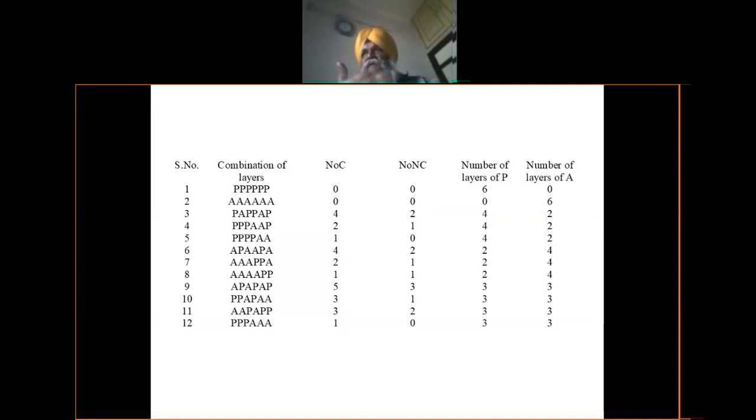Once the PLA is deposited over the ABS layer, the PLA comes out because of a change in the Tg of that material. So I am calling it a negative conversion.

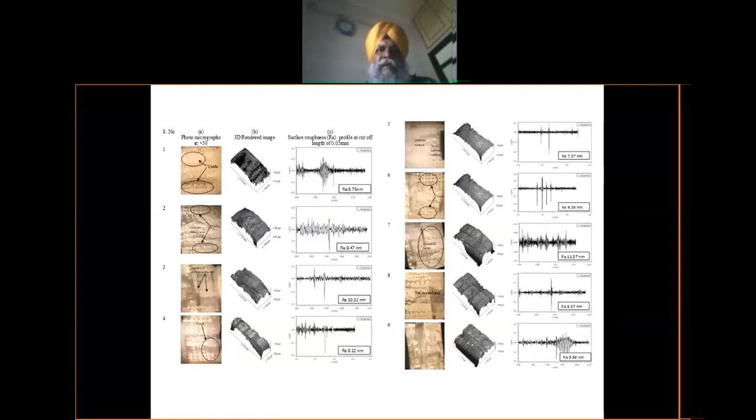So based on their thermal analysis and this type of testing, the observation is that once we go for mechanical testing, we should follow a thumb rule: for better mechanical properties, we should select conditions where the number of conversions is minimum, followed by minimizing the number of negative conversions. If we follow this, we will definitely get better mechanical properties.

So far I have not discussed using any particular DOE for printing ABS with PLA. We have done this, but there is also a need for post-processing techniques, and we can extend this to other commercially available thermoplastic materials with different glass transition temperatures, rheological properties, and morphological properties, and print any substrate.

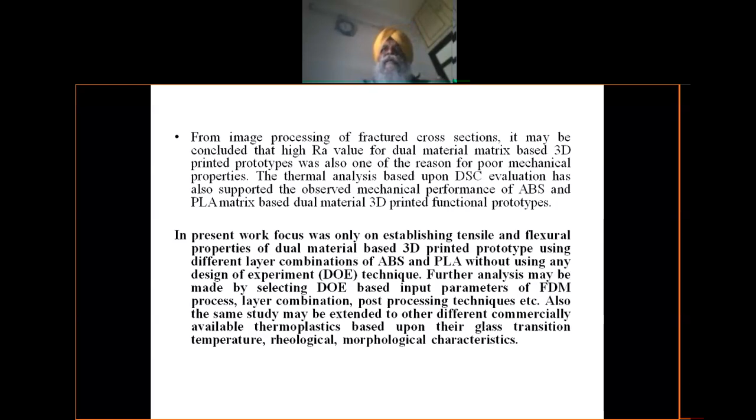Right now I'm talking about antennas only for transmission of signals, like for DTH or mobile signals, but we can use this type of input even for recognition of animals, or for surveillance of buildings. Because whatever substrate material I use, I can create a charge over it using different conductors and insulators, and monitor remotely whether my installation is safe or not, while also controlling the environmental conditions for different applications.

That's all from my side using 3D printing and 4D printing. The only benefit I get is flexibility in design. I can print any shape, and I can control the insulator and conductor dimensions based on the number of layers printed.

That's all. Now I am open for any questions. Any question I would like to answer.

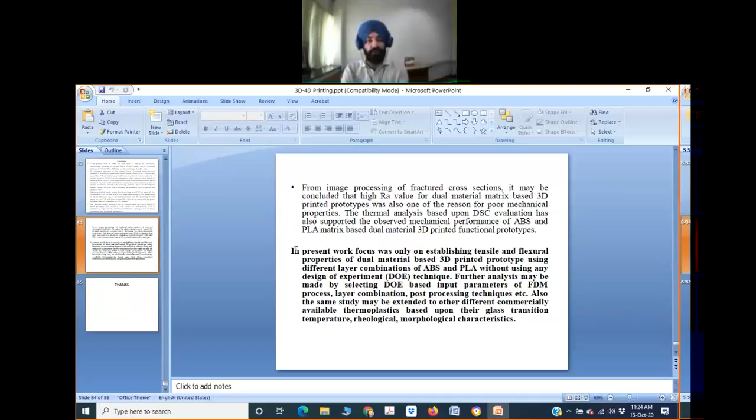Sir, are you able to listen to me? Sir, are you able to listen? I think, sir, you are not able to listen to me. So, dear participants, I'm not able to hear you. Sorry.